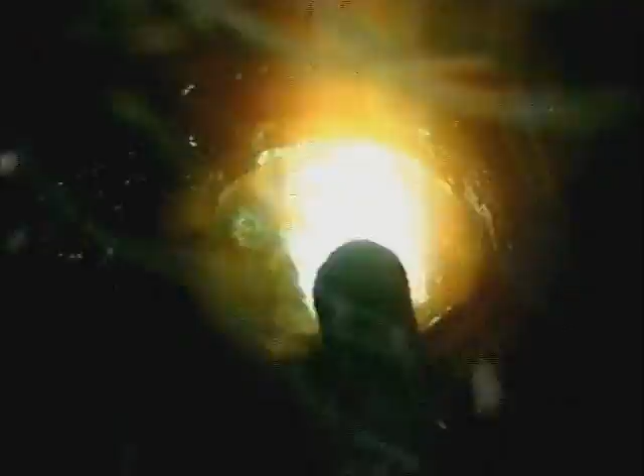From fabrication and repair shops to backyard garages, arc welding is one of the most common and versatile methods of joining metal. This is the SMAW, or shielded metal arc welding process. Electric current from a welding machine produces an arc between the base metal and a consumable electrode, which is the welding rod. That arc burns the flux coating on the rod, creating gases that shield the weld area from coming in contact with oxygen in the air.

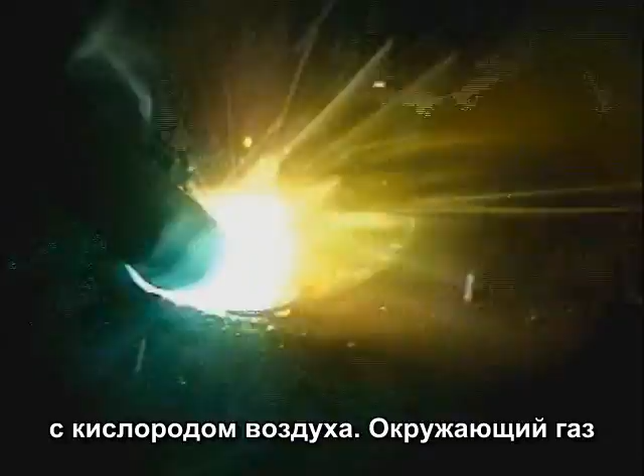The gases surrounding the arc are superheated, causing the base metal to melt, while the filler metal from the rod is being deposited into the molten puddle. Whether you're learning to weld to build something or make repairs, the first step is to learn how to consistently run a good weld bead.

Before we start burning rod, though, there are a few things you should know about the equipment we'll be using. So let's begin with the welding machines.

The job of a welding machine is fairly simple, and that is to provide a steady, controllable current to the electrode. Now, regardless of the size or shape, welding machines will provide either alternating current or direct current to the electrode. And this little machine gives you the choice of either AC or DC.

The main advantage of alternating current is that it's easier to produce. They use simple transformers, so you generally get more power for your money. This one will give you 225 amps on AC, but only 150 amps on DC.

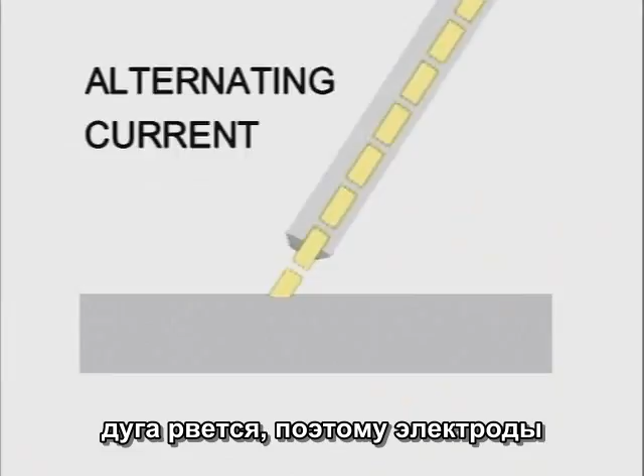If you think about alternating current, the electrons are moving back and forth, and at the point where the electrons change direction, the flow or current actually stops. Certain welding rods have been designed with stabilizers in the flux to help maintain and control the arc through these amperage lags. So if you're using a welding machine that provides alternating current to the electrode, you want to make sure to use a welding rod designed for alternating current.

Most welding shops and professional welders use machines that provide direct current to the electrode. And in my shop, I use a 250 amp DC machine. Direct current provides a steady flow of electrons in one direction. The polarity, or direction of flow, is determined by how the leads are connected to the positive and negative terminals on the welding machine. And many of the newer welding machines have a switch to choose the polarity.

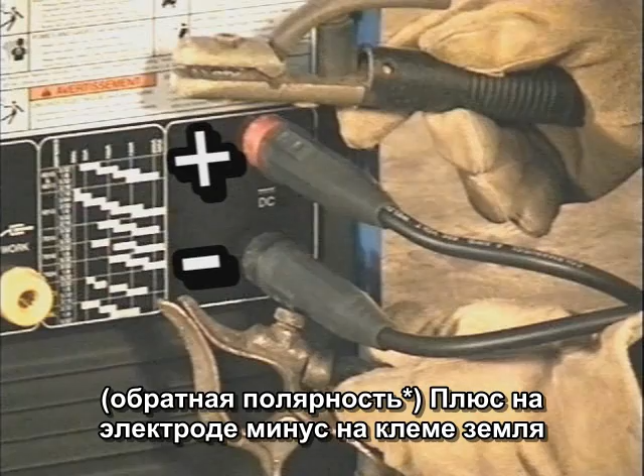DCEP, or DC plus, is direct current electrode positive. The electrode is connected to the positive and the ground is connected to the negative terminal. Current is generally considered to flow from negative to positive, so with the electrode positive, the arc actually travels from the metal up to the welding rod. This causes the tip of the rod to superheat. For general purpose welding, all the common welding rods use DC EP with the electrode positive.

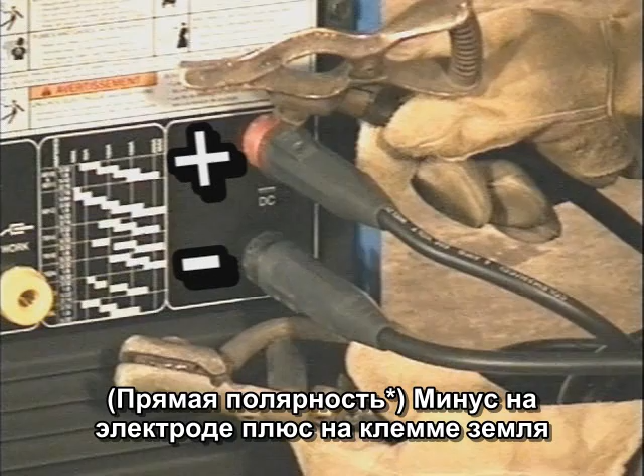DCEN, or DC minus, is direct current electrode negative. The electrode is connected to the negative terminal and the ground is connected to the positive. With DC EN, the flow is from the welding rod to the metal, so the rod stays cooler and the metal gets the heat. This is used with certain rods for high-speed sheet metal welding.

When you're starting out, you'll probably be welding with a machine that's put in front of you. And basically, if it's in proper working condition, you can weld with it. Keep in mind, though, that welding machines will weld differently. Even two identical machines may not operate quite the same. So while you're learning to weld, try to use the same machine as much as possible.

Welding leads are insulated copper wire and come in sizes like a number 4, 2, 1, and single aught. The larger the number, the smaller the diameter. The size welding lead you need to use depends on how many amps you'll be using and how long the lead is. And welding supply stores have charts to determine the size lead you need to use.

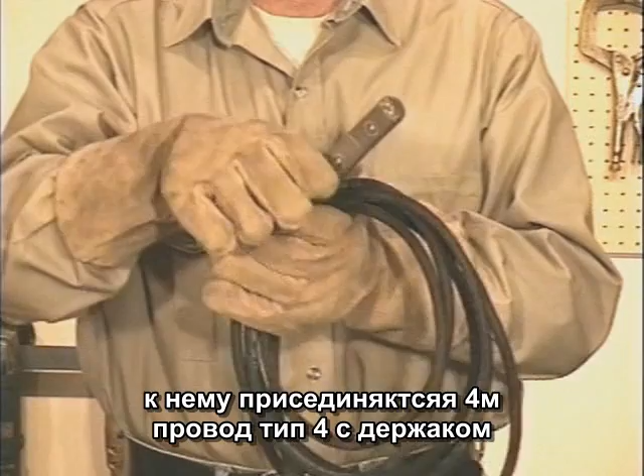On the end of the main lead, I use a quick connect with about 15 feet of number 4 lead and the electrode holder. This is called a whip. The smaller lead is a little more flexible and easier to deal with. This is a 200 amp electrode holder. Larger ones like 250 or 300 amp are available if you're mainly using big rods with high amperage settings. But for general use, the 200 amp is more comfortable. And I usually call this the stinger.

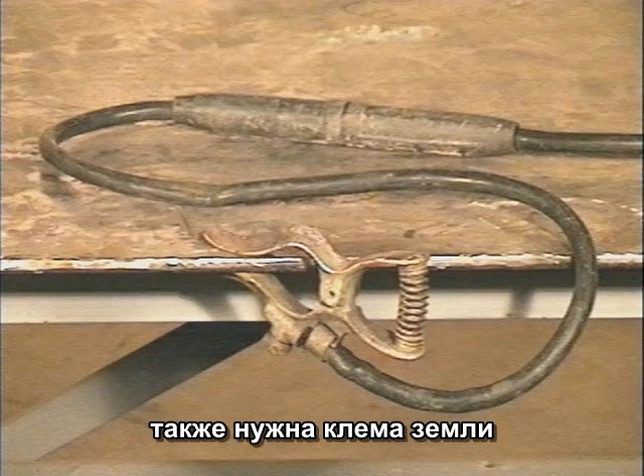Another type of electrode holder is available where you stick the rod in and twist the handle. If you need the rod at a different angle, you can just bend it. You also need a ground clamp, and I use a quick connect here too, in case I need to add more lead.

The light from arc welding is extremely bright. You need filter lenses both to see the molten weld puddle and to protect your eyes from getting burned. These are typically available from a number 8 to a number 14. The lower the number, the lighter the lens. From what I can tell, some people are more sensitive to this light than others.

A number 8 filter lens is way too light. Industry recommends a number 10, and I use a number 9. The lens has to be dark enough to protect your eyes, but light enough so you can clearly see the weld puddle. If you're welding with big rods using high amperage, you may want a shade darker lens than normal. And if this filter lens gets chipped or cracked, replace it.

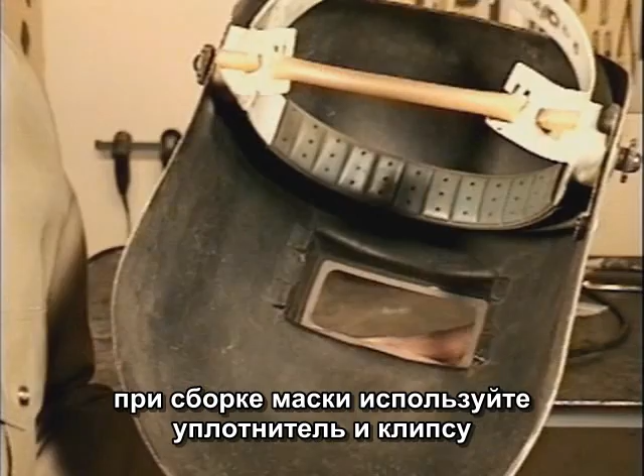To protect the filter lens from sparks or getting scratched, I use clear plastic lenses in front and in back. There's a gasket that goes in first to seal the lenses, and everything's held in place with a clip. After you install the lenses, hold the hood up to a light and check for leaks around the edges.

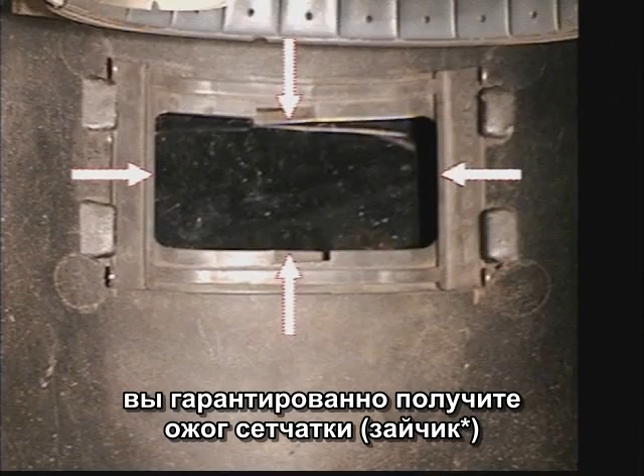When you start welding, check it again. If any light from the arc is leaking around the edges of the lenses, it'll burn your eyes for sure. Also, replace the clear lenses when they get dirty or scratched. Having a clean lens makes a big difference in allowing you to clearly see the weld puddle.

Okay, the last thing we need are welding rods. So let's take a look at some of the common ones. Some of the more common welding rods for carbon steel are E6010, 6011, 6013, and 7018. And the numbers are written right on the rods. These numbers actually mean something, so let's take a look at E6010.

The E designates an arc welding electrode. The first two numbers, in this case 60, indicate that the filler metal has a tensile strength of 60,000 pounds per square inch. Depending on certain conditions of the weld, you may get a little more or less, but it'll be close to that. The 70 in 7018 indicates 70,000 pounds per square inch. So the first two numbers indicate tensile strength, and tensile strength is the force it takes to pull it apart.

The third number indicates the position the rod can be used in. A number 1 shows that the weld puddle solidifies quick enough so this rod can be used in any position: flat, vertical, horizontal, or overhead. A number 2, like in 7024, indicates that the molten puddle remains so fluid this rod can only be used in the flat position or for a horizontal fillet, which is more or less flat.

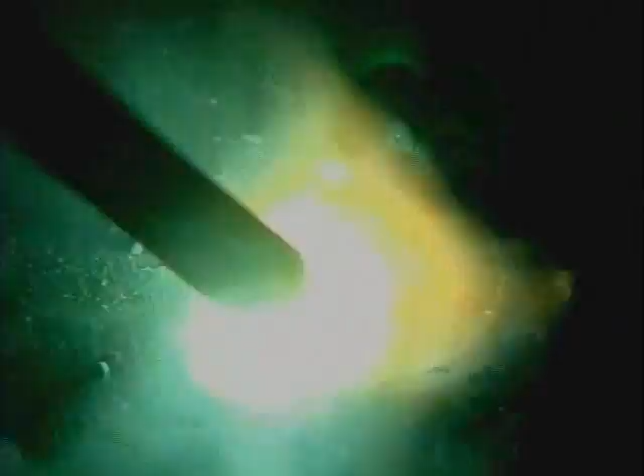The last two numbers together, here it's a 10, indicate the composition of the flux coating. And this flux is what makes the whole arc welding process possible. As it burns, a gas is created that purges the weld puddle, keeping the oxygen in the air from mixing with the molten metal, which could cause gas pockets in the weld bead called porosity.

The flux also helps stabilize the arc, and it lifts impurities from the molten metal. When the flux cools, it forms a slag coating over the hot weld bead, providing more protection from the air. There isn't a magic welding rod that just does everything. You may find one that you like to use, and that produces good results. But basically, welding rods can be put into one of two groups: fast freeze or filler.

The fast freeze rods, 6010 and 6011, have a strong arc force that provides deep penetration. A light flux coating makes the molten weld puddle clearly visible, and the weld puddle solidifies relatively quick, leaving distinct ripples in the finished weld bead.

Filler rods, 6013, 7018, and 7024, don't penetrate as deep. They build up weld bead. A heavier flux coating covers the weld puddle, keeping it more fluid, allowing for a smoother finished weld bead.

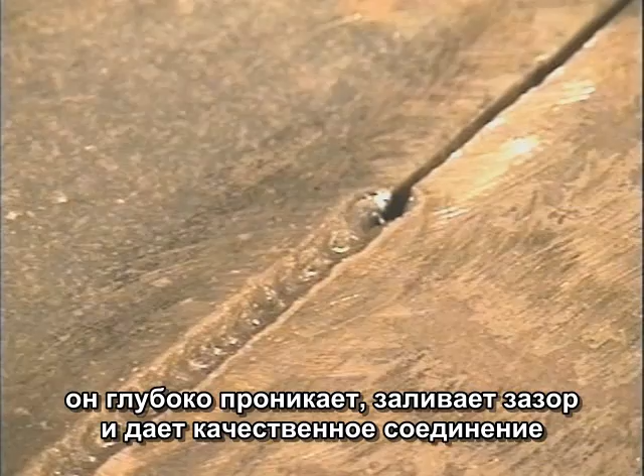So where exactly do you use these different welding rods? 6010 is used strictly on DC plus and 6011 on AC or DC plus. The strong arc force of these rods can blow off rust and paint, making these a good choice for repairs or modifications where the metal can't be completely cleaned. Also, these rods are often used as a first pass to provide deep penetration or to fill gaps and fit-ups that are less than perfect, then covered with a filler rod.

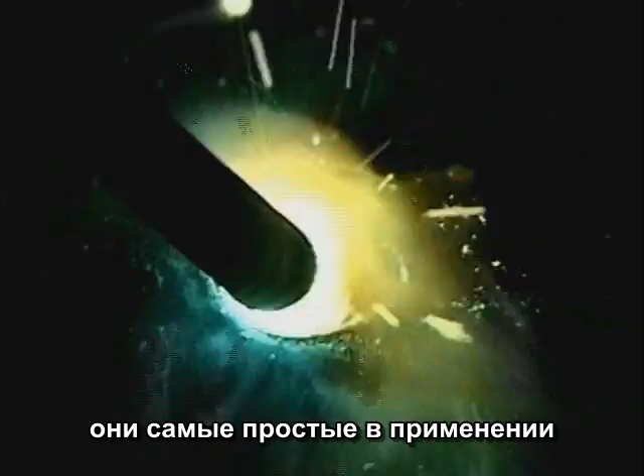6013 was actually designed for high-speed sheet metal welding on DC-, but these rods can also be used on AC or DC+ for general purpose welding and light fabrication. With stabilizers in the flux, 6013 is probably the easiest of all the rods to use, and it produces a smooth finished weld bead.

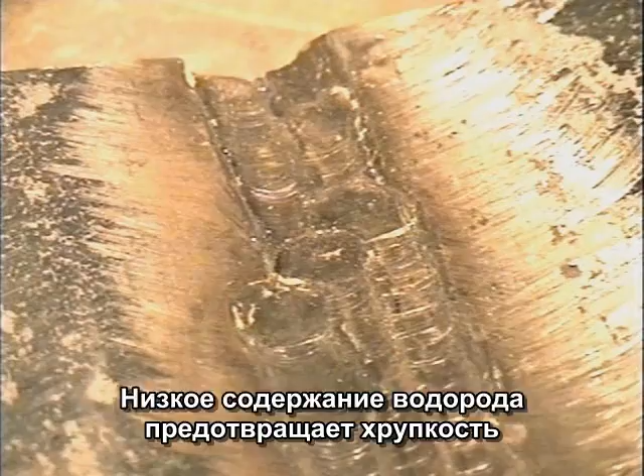7018 is a low hydrogen rod with iron powder in the flux. It's generally used on DC+, and an AC 7018 is also available. These produce the highest quality welds and were developed for situations where there's extreme stress on the weld joint. It can be used to weld some of the harder low alloy steels and cast steels, and when making heavier welds, the low hydrogen characteristics prevent the weld from cracking because of the expansion and contraction of the metal. Iron powder in the flux provides a high filler metal deposit rate, which means you can put more metal down faster. 7018 produces a smooth finished weld bead, but does require clean metal and a well-prepared joint.

7024 was used extensively in fabrication before wire feed. A heavy flux coating produces an extremely smooth weld bead, but these rods do require clean metal and a slightly higher amperage setting. 7024 can be used on DC+ or AC, and the 2 does indicate that this rod can only be used in the flat position.

6010, 6011, 6013, and 7018 are common rods and should be available everywhere. There are other welding rods, and they'll either be a fast freeze or a filler, with a different tensile strength, a slightly different flux covering, and usually designed for a specific purpose. Now, each of these rods has distinct characteristics, but there are some basic fundamentals that are common to all of arc welding. We'll start with the fast freeze type rods, because the light flux allows you to see the molten weld puddle clearly.

The fast freeze rods 6010 and 6011 are similar, and the same techniques can be used with either one. 6010 on DC+ might freeze or solidify a little quicker. 6011 with either AC or DC+ may be a little easier to use because of the stabilizers in the flux that help maintain the arc.

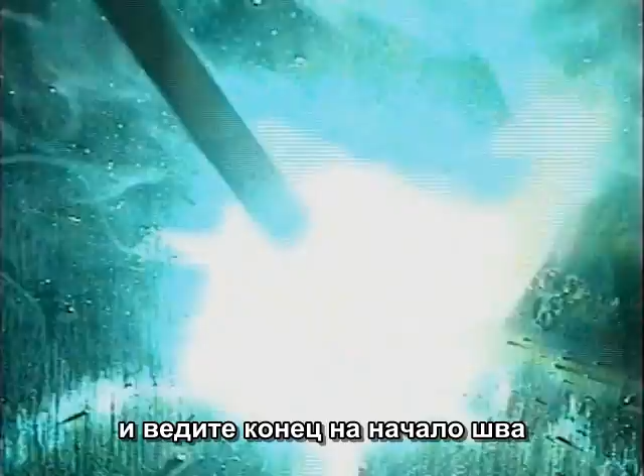Starting the arc is like lighting a match. Drag the rod right against the metal. When it lights, bring the tip up and move back to the start. A scratch start gets the flux burning, forming the gases that purge air away from the molten puddle. To avoid leaving arc burns all over the metal, try to scratch right where you intend to weld. I usually hold the stinger with my thumb on the release lever. If the rod ever sticks, just open the stinger, then go back and break the rod off. If you're relighting a rod, the flux may be broken off a little at the tip. A scratch start will burn off that tip before you start depositing metal.

Once the rod is burning, you need to start the puddle, giving the molten filler metal a little extra time to fuse to the base metal. This doesn't take long, only 2 or 3 little circles. Also, as the weld progresses, the base metal will heat up, causing the molten puddle to spread out. Start the puddle wide enough to keep the weld bead a uniform width.

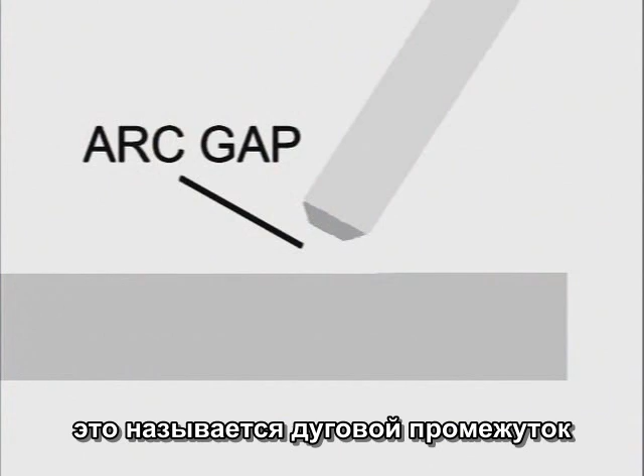During the weld, the tip of the rod is held up off the metal. This is called the arc gap. Having control of this arc gap is one of the first and may be the most important thing you need to learn. As you're moving along to build weld bead, the rod is being consumed, so you also have to be moving in. And the whole time you need to maintain a constant, uniform gap between the tip of the rod and the base metal. If the tip of the rod is jammed right down on the metal, the arc doesn't have time to heat up the base metal.

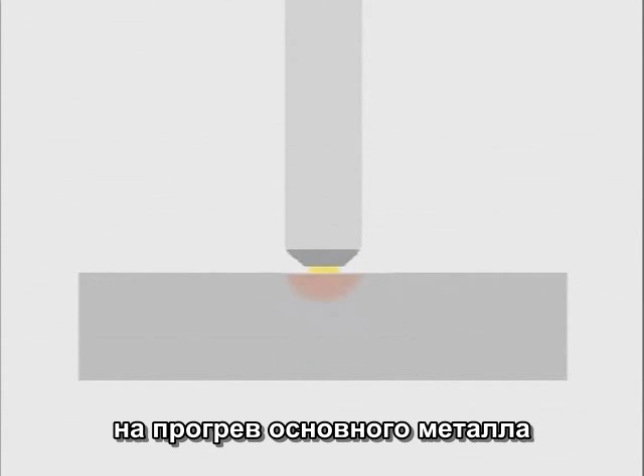The weld bead kind of squirts out the back, not tying in well on the sides. If the arc gap is too long, the arc itself can jump around. Penetration will vary and you lose control of how the filler metal is deposited.

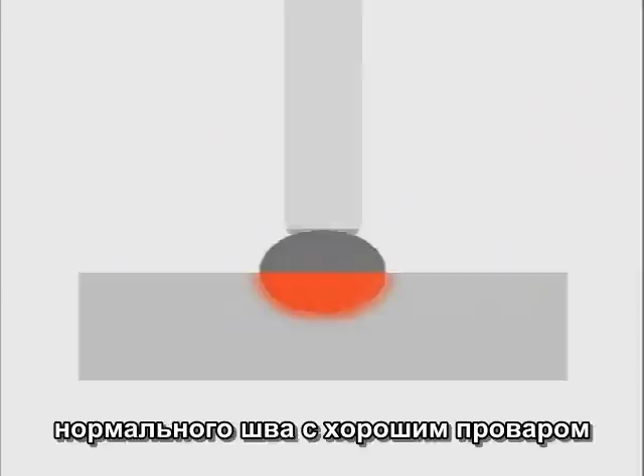Maintaining a constant arc gap is the first step to controlling the molten puddle and producing a uniform weld bead with consistent penetration. The better you learn to control that arc gap, the better you'll be able to weld.

When the arc crosses the gap, it melts the base metal, forming a molten puddle. That arc stream also carries the filler metal from the rod into the puddle.

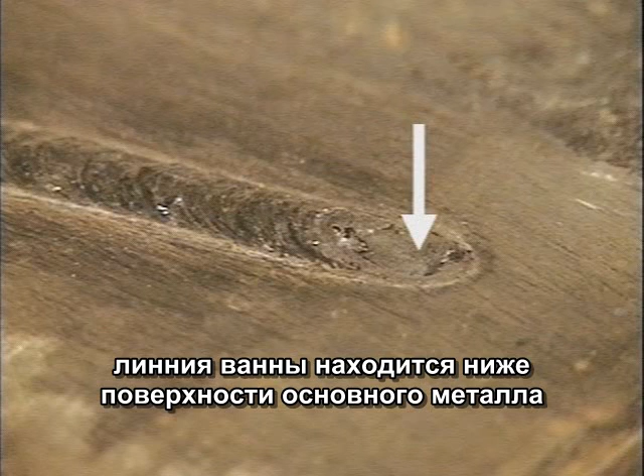This is a 6010 weld bead that I pulled out of quickly. The leading edge of the puddle was actually below the surface of the metal. The strong arc force of 6010 and 6011 penetrates deep into the base metal and pushes the molten puddle back, building up weld bead. While you're welding, watch the sides, right where the weld buildup meets the surface of the base metal.

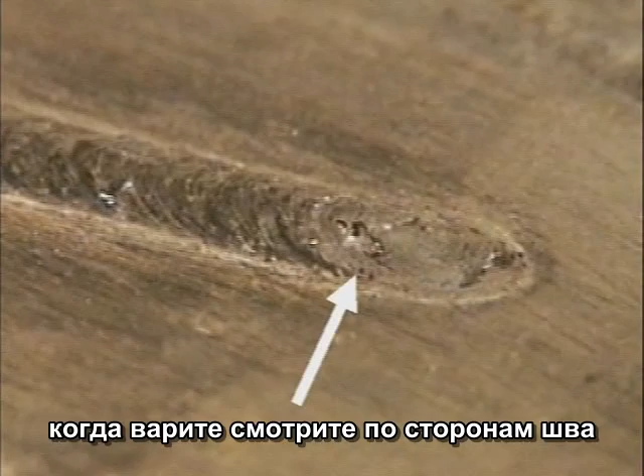For building up weld bead, either a circular or zigzag motion is commonly used. With a circular motion, as you ease the puddle over, watch the edge. When you bring it across, watch the weld build up, then the other side, and just ease the puddle around and around.

A side-to-side or zigzag motion will produce nearly the same weld bead. Watch the outside edge, the weld build up, and the outside edge every time you cross.

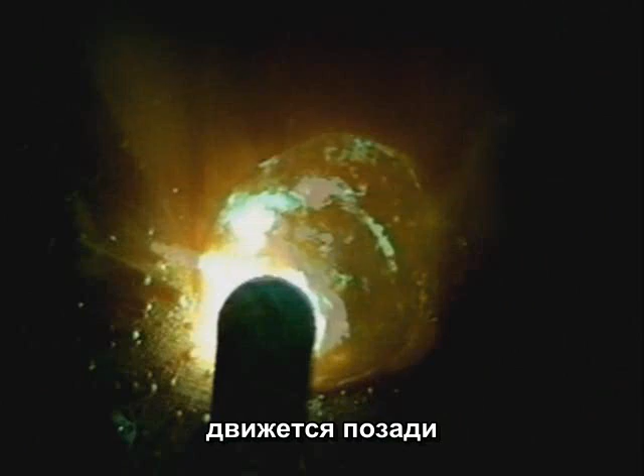Something you want to keep in mind is that molten metal will follow the heat. Whenever you move the puddle across, while you are adding filler metal from the rod, molten metal is also following from the side. If enough metal isn't put back there when you come around again, you'll leave undercut.

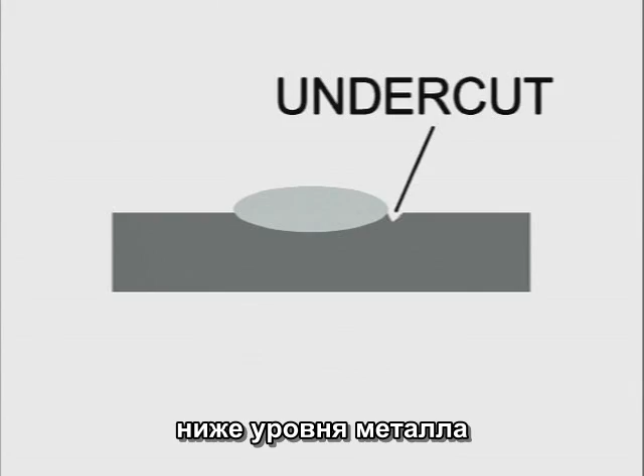Undercut is a void or groove along the edge of the weld bead that's below the surface of the base metal. You can avoid this by always watching the outside edges to make sure the puddle is filling in and tying in at the surface.

There's an arc force at the end of this rod that we can use to help manipulate the weld puddle by angling the rod. Think of it more like pushing the puddle instead of dragging it.

Generally speaking, the straighter up and down you hold the rod, the less weld buildup. As you angle the rod, the more the weld bead will stack up. When the rod is held straight up and down, all the heat is concentrated right under the rod, and the arc force drives the puddle down.

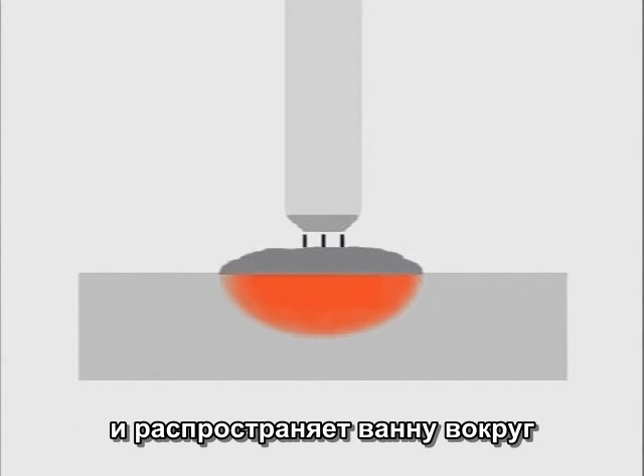This results in deep penetration and spreads the puddle out for a flatter weld bead. As the rod is angled, the arc force is directed more to the back of the puddle, allowing the weld to build up. If the rod is angled too low, the arc is directed right where you're trying to build weld, making the puddle hard to control.

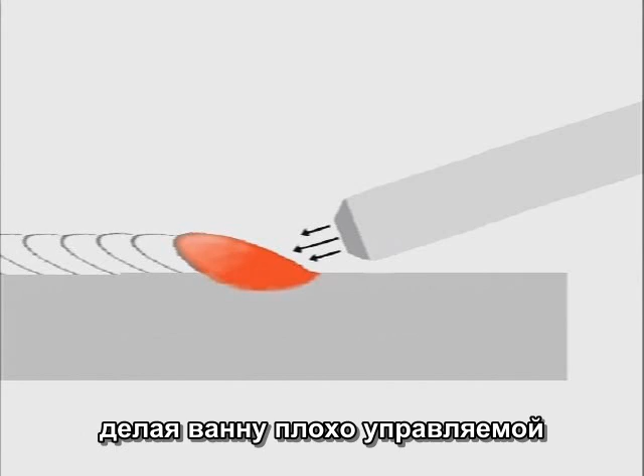You will run into situations where you may want to flatten out the weld, or you'll need to push the puddle back more, so you'll use different rod angles. When you're starting out, an angle somewhere between 45 degrees and straight up and down is comfortable, allows a good view of the puddle, and works well for building weld bead.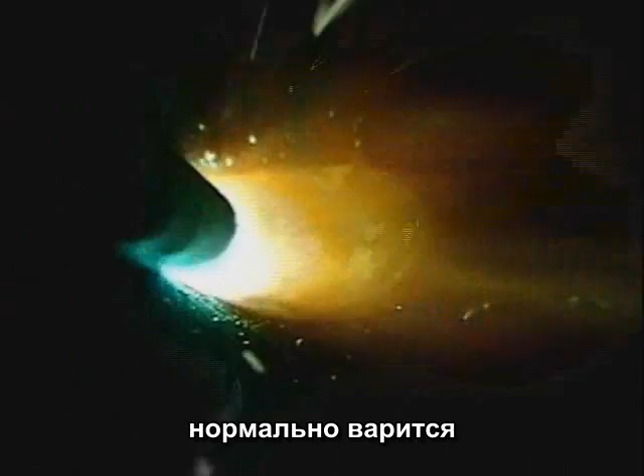The rod size is the diameter measurement of the metal in the electrode. Common sizes are 3/32, 1/8, and 5/32.

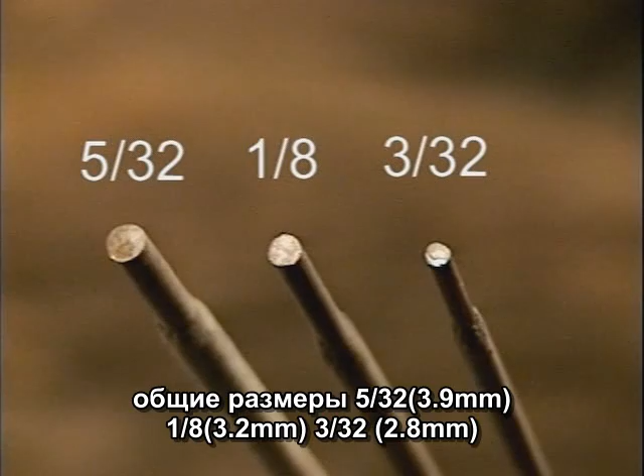Most welding rod size charts, where they give the metal thickness to the rod size and amperage setting, are generally from the point of view of maximum weld in minimum amount of time, often not taking into account the welder's ability or different welding situations.

You can always use a smaller diameter rod for better control. It just takes a little longer to build up weld bead.

This is a 1/8 E6010 electrode, and this is the most common size used. The manufacturer's recommended amperage setting is from 75 to 130 amps. They're saying this rod will work over a 55 amp range. The specific amperage setting is considered a variable and depends on metal thickness, position of the weld, and the welder's ability.

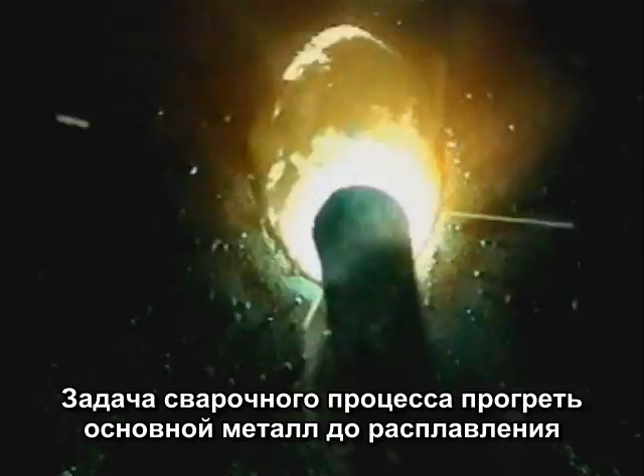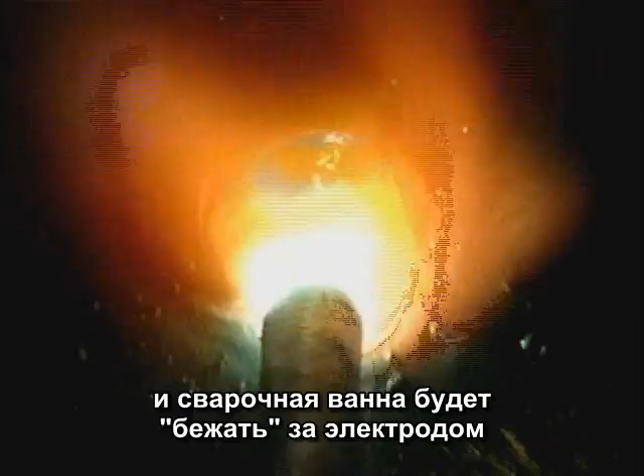The whole purpose in arc welding is to get the base metals hot enough to melt, forming a molten puddle. If the amperage is set too low, the base metal doesn't get hot enough, and the puddle looks like it's following the rod around.

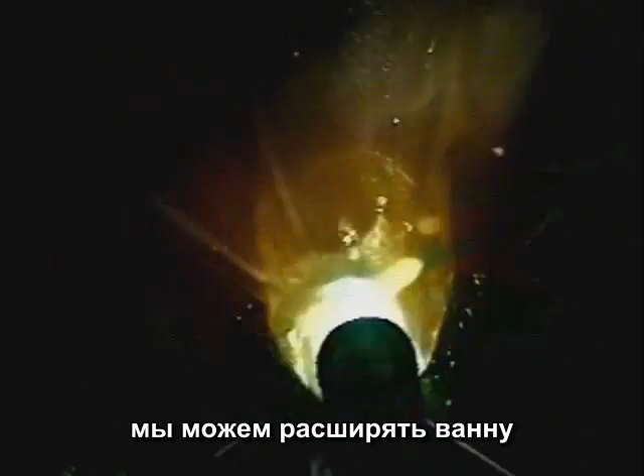If the amperage is set too high, the base metal gets too hot. The stronger arc force gouges deep into the base metal and pushes the puddle back. When the amperage is set about right, the puddle will spread out and the outside edges tie in immediately. You can ease the puddle around, kind of pushing it with the movement of the rod.

Depending on each welding situation, the amperage setting can change. Thicker metal dissipates the heat, so you need a little more amperage. Thinner metal will get hot fast, so you can use a little lower amperage. The final amperage setting is determined by what the molten puddle is doing. You do need a place to start, so try about the middle of the manufacturer's recommended range, and don't be afraid to go up or down a little bit.

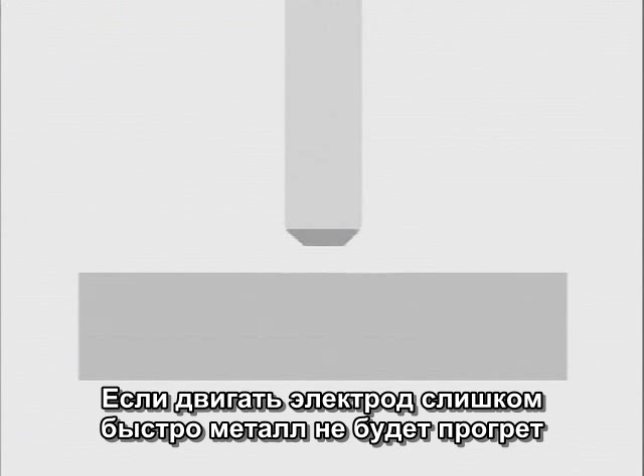Welding really is about the temperature of the base metal, so we can't talk about the amperage setting without looking at the speed of progression, or travel speed. The faster you move, the less time heat is put to the base metal, so it stays cooler. When you move slower, you're putting the heat to it for a longer amount of time, so the base metal gets hotter. When you move too fast, the metal doesn't have time to heat up, so the weld bead just skates across, not getting any penetration.

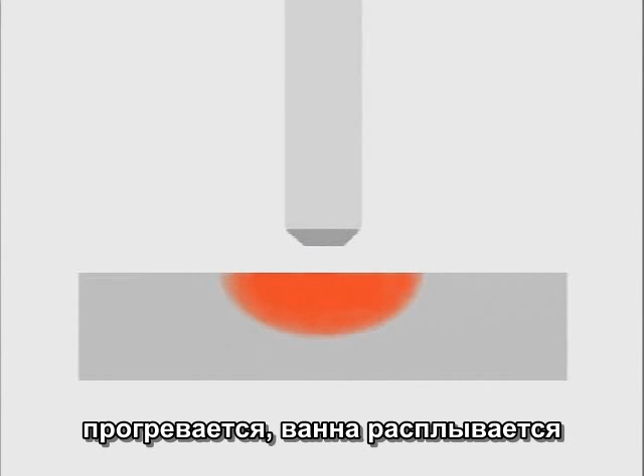If you move too slow, the metal gets extremely hot, causing the puddle to spread out, making it hard to control. When the travel speed and amperage setting match, the puddle spreads out, but it's still controllable. The sides tie in and the weld builds uniformly.

As you gain more control of the rod, try using a slightly higher amperage setting and increasing the speed of travel. The higher amperage setting provides better penetration and a smoother finished weld bead. Try to weld as hot as you can control the molten puddle.

To finish a weld bead, add a little extra metal before you pull out, to avoid leaving a crater that's below flush with the surface of the base metal. Circle the rod once or twice, then bring the rod up and back over the weld.

While different rods may not look quite the same, these are the basic steps for all the welding rods. Scratch to get the arc going. Start the puddle wide enough to keep the weld a uniform width. Maintain a uniform arc gap with an amperage setting high enough to let the puddle spread out. Ease the puddle around using the force of the arc and watch the sides and the weld build up. Add some filler metal before pulling out over the weld bead. That's about all there is to it.

For 6010 in the flat position, try a circular motion and angle the rod to build up weld. Watch the molten puddle, not the light. Keep the circles tight for a smoother weld bead. A zigzag motion will produce about the same weld. Watch the edges to make sure they're filling in and ease the puddle back and forth.

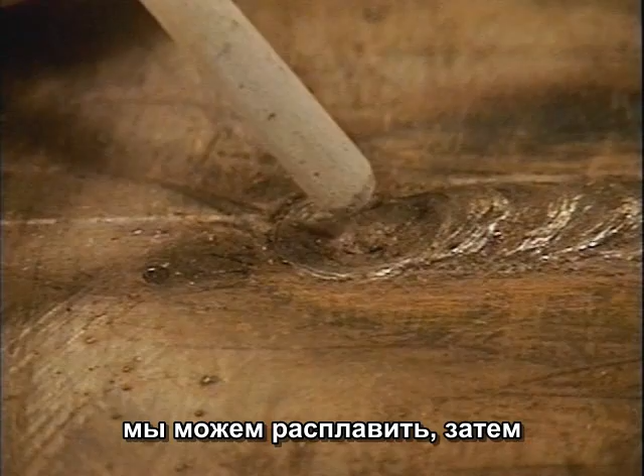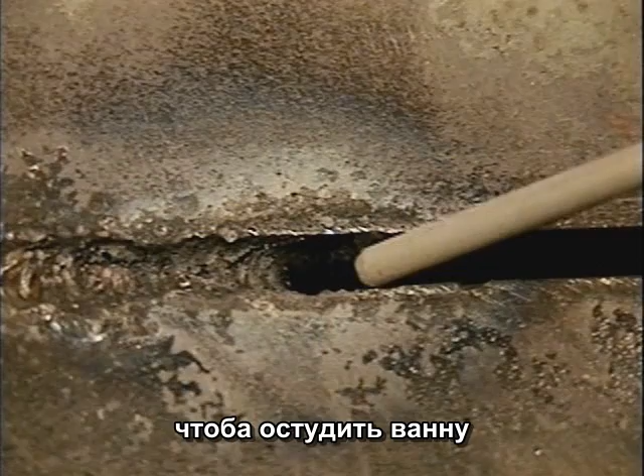On thinner metals, where you don't need a lot of penetration, you can puddle, then long arc to let the weld bead cool, and puddle again. The thinner the metal, the faster this goes. The step motion can also be used to fill gaps in poorly fit joints. Keep the rod deep in the gap and bring it back, allowing the metal to cool. Then push a little more metal in to fill the gap and let it cool again. The step motion may not always look real slick, but it's usually covered with another pass.

So far, we've been welding in the flat position. For a vertical with 6010, you can run either uphill or downhill. Downhill is easier, but there's less penetration and weld buildup. Because heat rises, you're welding away from the heated metal, so you can use a slightly higher amperage setting. Watch the sides and the weld buildup.

Try a circular, zigzag, or step motion and angle the rod up a little so the force of the arc helps hold the puddle up. With a circular motion, keep a steady arc gap and ease the puddle around. Move fast enough to stay ahead of the molten puddle. If the puddle wants to drip down, try moving faster, or maybe even a slightly higher amperage setting.

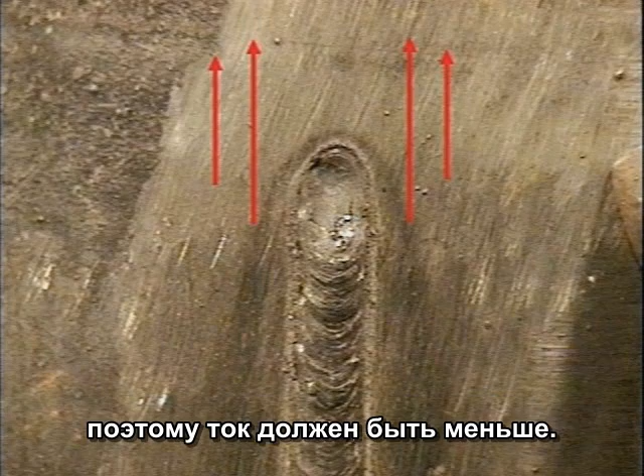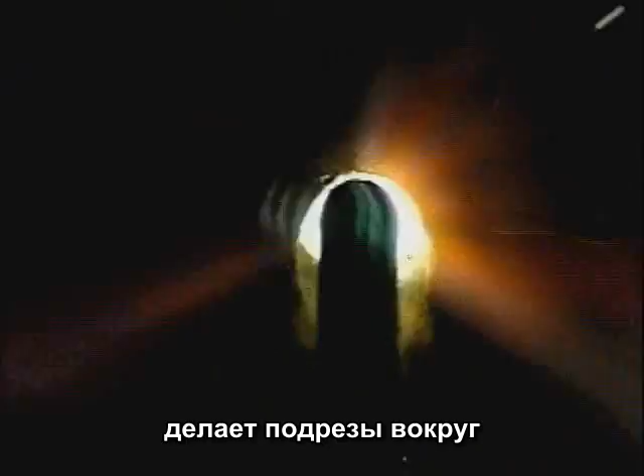When you weld uphill, you'll be welding into the heated metal, so turn the amperage down a little. Angle the rod up so the force of the arc doesn't blow the puddle out. An uphill weld really gouges into the base metal, making undercutting a potential problem. So pay particular attention to the sides of the puddle and watch the weld buildup underneath the rod.

If the base metal gets too hot, the puddle may fall out, or you might burn a hole right through the metal. Mess with the amperage setting and your travel speed until you can carry that puddle right uphill.

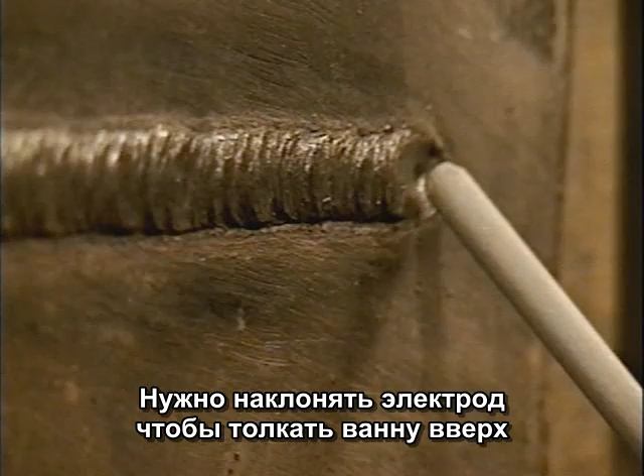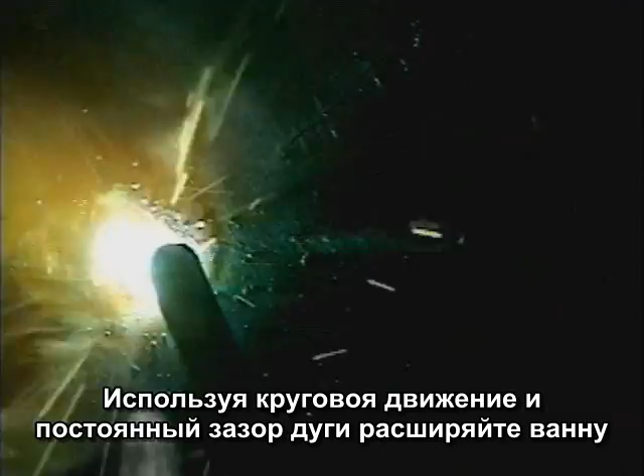A horizontal weld is across, and you want to angle the rod to push the puddle up. Keep the rod nearly perpendicular to the metal or angle into the weld a little bit. If you angle the rod too far, the arc force can blow the puddle out. Using a circular motion, keep a steady arc gap and just ease the puddle around.

Every time you bring the rod down, the molten metal will follow the heat. Make sure you push the puddle up and watch the top side. If the bead is wanting to sag down, try a faster travel speed to keep the base metal cooler.

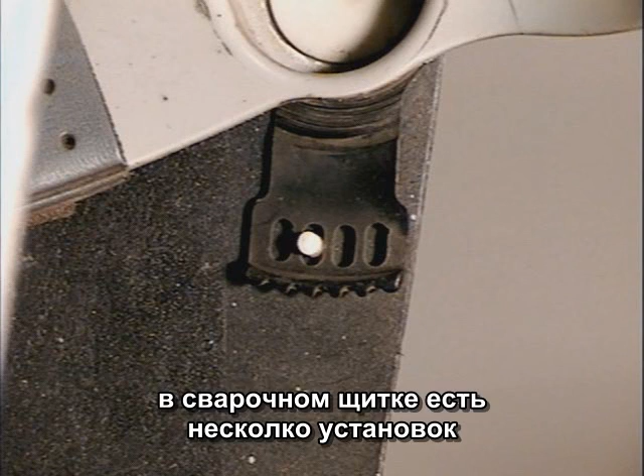That leaves us with overhead, straight up and down. Overhead is about the same as welding flat, just a little more awkward. The real challenge is to find a comfortable position so you can keep the rod steady. Your welding hood should have an adjuster to help hold it up, so you don't have to bend your neck back so far.

Now, believe it or not, the molten puddle doesn't want to fall out. Unless you blow it out with the arc force, the molten metal wants to stay with the heat. It likes the heat. Hold the rod nearly straight up and down or angled slightly in the direction of travel, away from the weld. Try a circular motion and just make the puddle look the same as when you're welding flat. All the sparks will be coming your way, so wear protective clothing like a leather coat, some good gloves, and I like to cover my ear with a hat. Getting burned is a little distracting when you're trying to run a good weld bead.

6010 and 6011 won't give you a smooth finished weld bead, but they do provide deep penetration in weld joints and when making repairs.

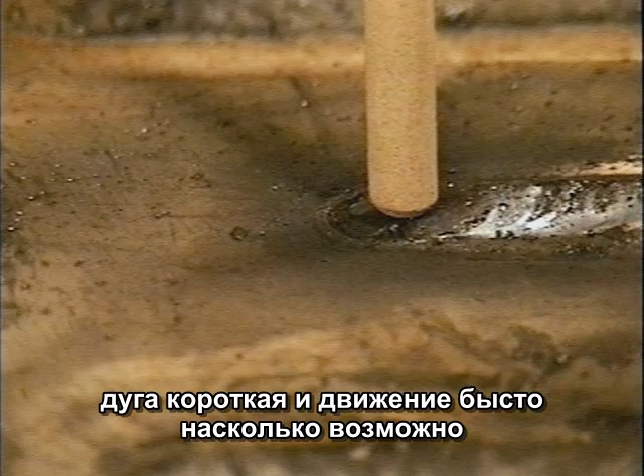6013 welding rods were developed for welding sheet metal on DC-. The rod is held perpendicular to the metal with a tight arc, and the travel speed is as fast as you can go without having the weld bead skip.

Today, 6013 is more often used for general purpose welding with AC or DC+, and it is a good rod for the small, low amperage welding machines.

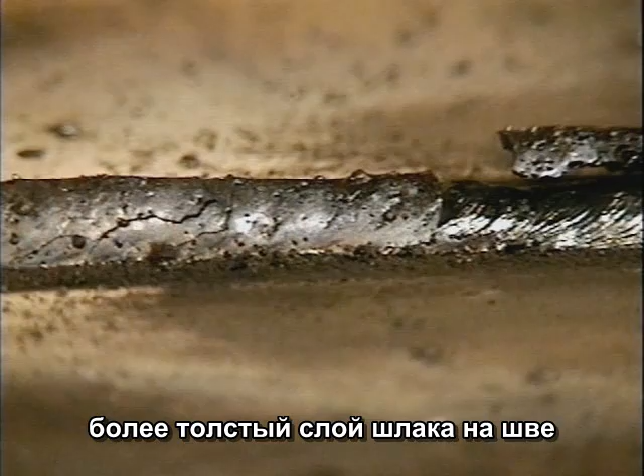One of the first things you'll notice about 6013 is that there's a heavier slag coating on the weld bead. The slag even covers the top edge of the weld puddle. This keeps the puddle more fluid, helping to produce a smoother, finished weld bead.

Typically, 6013 is available in 3/32, 1/8, and 5/32. 1/8 is the most common size used, and try starting with an amperage setting around 130 amps on AC or 115 amps on DC.

Because of the slag covering, the differences in the appearance of the weld are a little more subtle, but when the amperage is set too low for the situation, the puddle will follow the rod around, taking longer to tie in on the sides. The heavier slag may even interfere with the arc.

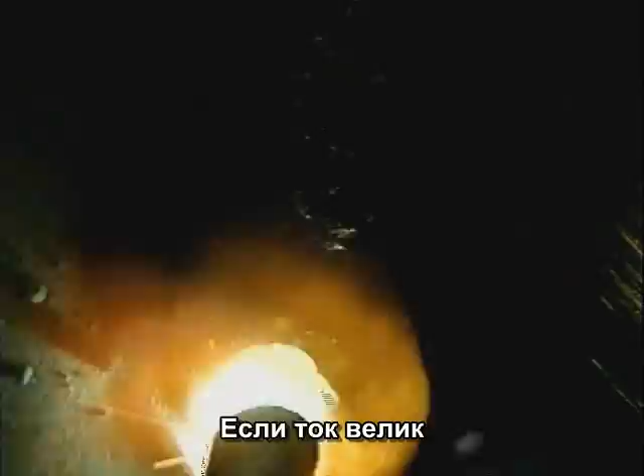If the amperage is set too high, the molten puddle and slag are extremely agitated and remain molten longer. When the amperage is about right, the weld puddle spreads out, tying in and moving easily with the motion of the rod. In the flat position, you can run straight or try a little side-to-side motion.

Angle the rod somewhere between 45 and 90 degrees to build up weld bead. Scratch start the puddle, and maintain a short arc gap, even to the point of lightly resting the tip of the rod on the metal.

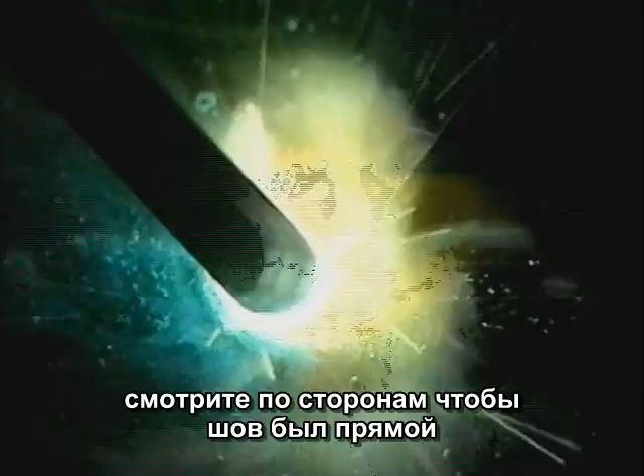Watch the puddle. The slag covers the top edge, but you can still get an idea of the weld buildup. Watch the sides to keep the weld bead straight, and just ease the puddle side to side.

On vertical welds, 6013 was designed for a downhill application. You'll be welding away from the heat, so try turning the amperage up 5 to 10 amps. Angle the rod up so the force of the arc helps hold the puddle up.

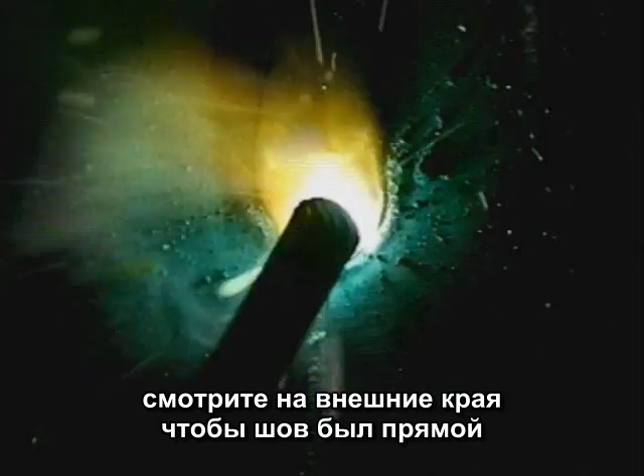Maintain a short arc gap and try a slight side-to-side movement. Watch the outside edges to keep the weld bead straight and travel fast enough to stay ahead of the molten puddle. If you can't stay ahead of the molten puddle coming down, try moving a little faster or raising the amperage setting.

For more weld buildup on heavier metal, 6013 can be run uphill. Start by turning the amperage down 5 to 10 amps.

Try using a side-to-side motion, moving up fast enough to keep the puddle from dripping down. Make sure the sides are filling in to avoid leaving undercut. To make a horizontal weld, angle the rod up to help push the puddle up.

Keep the rod nearly perpendicular to the metal or angled back into the weld just a little. Maintain a short arc gap and constant travel speed to produce a smooth weld bead. The molten slag will run down, covering the bottom, but watch the top side of the puddle. Move fast enough to avoid excessive weld buildup.

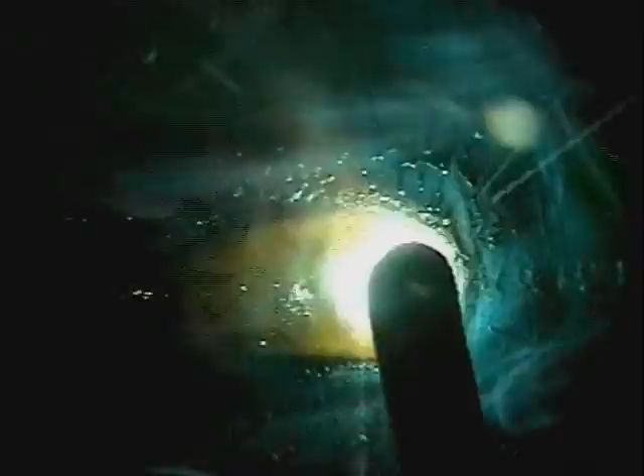While you're learning to weld horizontally, don't try to carry too much metal. Keep the weld bead small. If you need more weld, you can always run a second pass above the first one.

Overhead with 6013, like every other type of welding rod, is awkward. Hold the rod straight up, or, because of the mild arc force, you can angle it back into the weld a little bit, and try a slight circular motion. The heat of the weld is going straight up, right where you want it.

So if you can get in position to maintain a short arc gap and uniform travel speed, overhead will produce a good weld. 6013 is the favorite rod in many home shops. They're easy to light, they maintain the arc, and produce a good-looking finished weld bead.

7018 produces an extremely high-quality, good-looking weld bead. This is the rod to use for heavier fabrication and repair, or any situation where there's stress on the weld joint. These rods rely on a heavy slag coating to protect the molten weld puddle from coming in contact with oxygen in the air. This heavy slag makes 7018 run a little different than the other rods we've looked at.

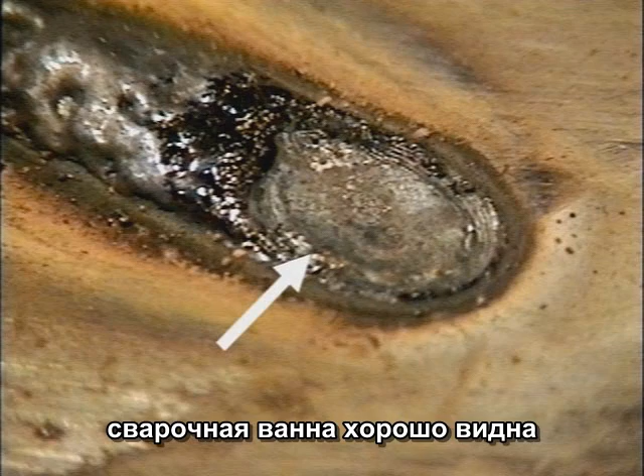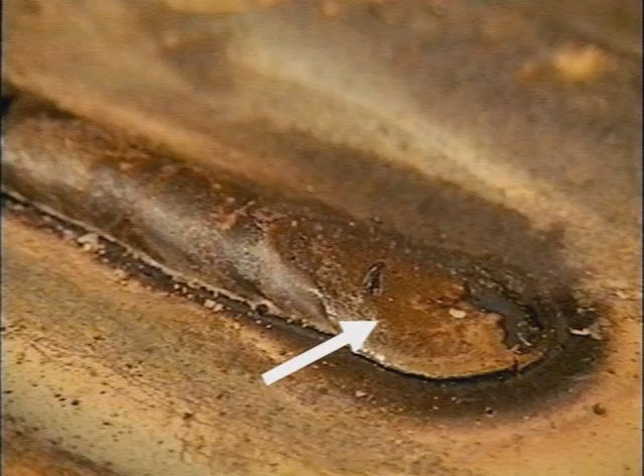With the fast freeze rods, 6010 and 6011, the molten metal in the weld puddle is completely visible. Slag covers the top edge of the molten puddle with 6013, but the filler metal and slag solidify pretty much at the same time. With 7018, the entire weld puddle is covered by molten slag. The filler metal actually solidifies underneath, while the slag stays molten on top.

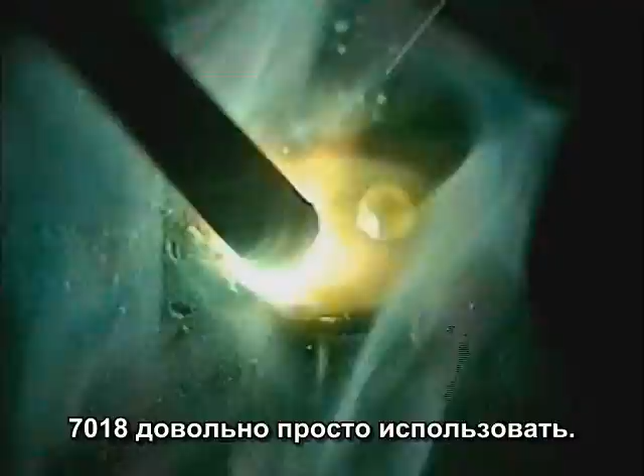If you keep in mind that what you see is molten slag and understand what the metal is doing underneath, 7018 is fairly simple to use. And even though the metal is solidifying underneath, watching the molten slag behind the rod will give you an idea of the weld buildup.

7018 is a little more sensitive to arc gap and rod movement. Make sure you're comfortable so you can be as steady as possible. A scratch start will get the flux burning before you deposit any metal. If you're relighting a rod, there's usually slag covering the tip. You may have to bump the rod to break that slag, then scratch to get going.

Once the rod is lit, start the puddle. Besides tying in and getting started wide enough, this gives a little extra time for the gases to cook out of the molten puddle. If you move too quick, gas pockets may cause voids in the weld bead called porosity.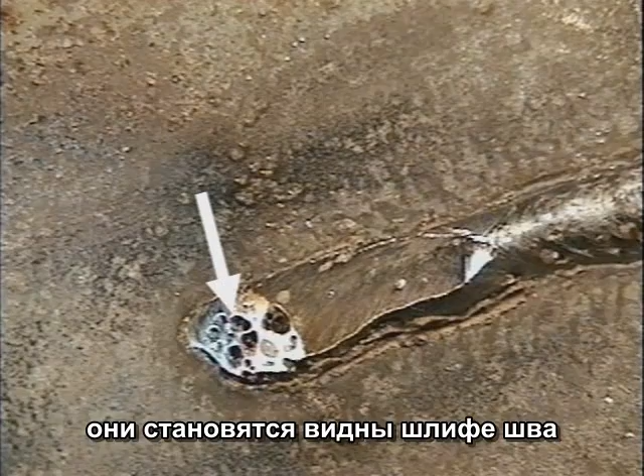Most times they're not even visible until you grind into the weld bead. Porosity can also be caused by welding on metal that's rusted, painted, or has any contaminants on it like oil or grease. 7018 does require clean metal.

After the puddle is started, try a little side-to-side motion, maintaining a constant short arc gap. In some situations, you can even lightly rest the rod on the metal. With a mild arc force and slag covering the puddle, you do want to avoid letting the rod burn up or pulling the rod away from the metal. You don't want to let that slag cool, so keep the arc in the puddle.

The typical rod sizes are 3/32, 1/8, and 5/32. Because the flux contains iron powder, which deposits more metal in the weld puddle, 7018 requires a little higher amperage, and these settings may vary up or down depending on metal thickness, weld position, and your ability to control the movement of the rod.

With molten slag covering the entire puddle, you depend more on how the puddle acts than how the puddle looks. If the amperage is set too low for the conditions, the puddle won't spread out, taking longer to tie in on the sides.

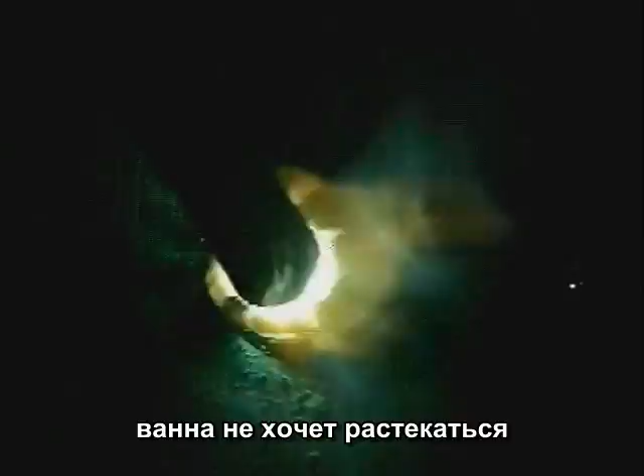The rod might stick or go out. If the amperage is set too high, the puddle is agitated and extremely fluid. Little balls of metal might dance off to the sides, causing excessive weld spatter.

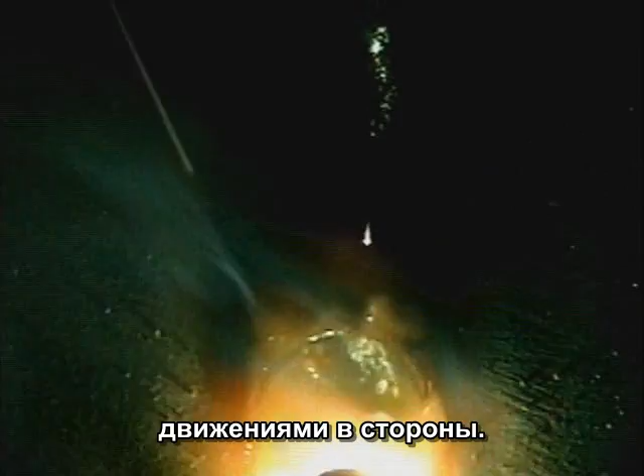When the amperage is about right, the slag solidifies back from the rod. The sides tie in and you can ease the puddle side to side. Here again, as you gain control of the arc gap, rod movement, and travel speed, you'll find that 7018 runs easier and cleaner with the amperage set a little to the hot side.

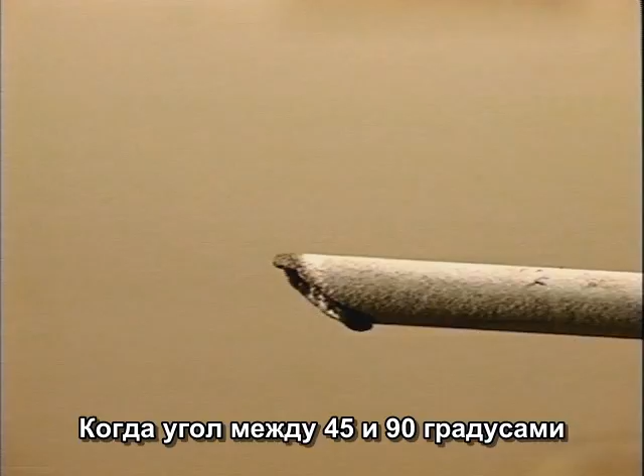The angle of the rod not only affects how the filler metal is deposited, but how the molten slag will behave. If the rod is held straight up and down, the slag can get in front of the weld puddle. If the rod is laid too far down, the flux coating won't burn evenly and the rod may stick. When the rod is angled between 45 and 90 degrees, the slag is forced back where it belongs, over the molten filler metal.

Welding in the flat position is fairly simple. Remember to relax, get comfortable, and use two hands on the stinger. Try to maintain a short arc gap and constant travel speed. Watch the outside edges of the puddle to make sure they're fusing and staying even. Look behind the rod for an idea of the weld buildup.

In the flat position, even 5/32 rods are fairly easy to control if your welding machine can produce enough amperage and there's plenty of metal to carry the heat.

For a horizontal weld, we'll be welding across. If you're just starting out, try using a 3/32 rod. The smaller puddle is a little easier to control. Normally, I weld from left to right because I can see the puddle better. For 7018 in a horizontal position, I move from right to left. You can weld in either direction, whichever is more comfortable.

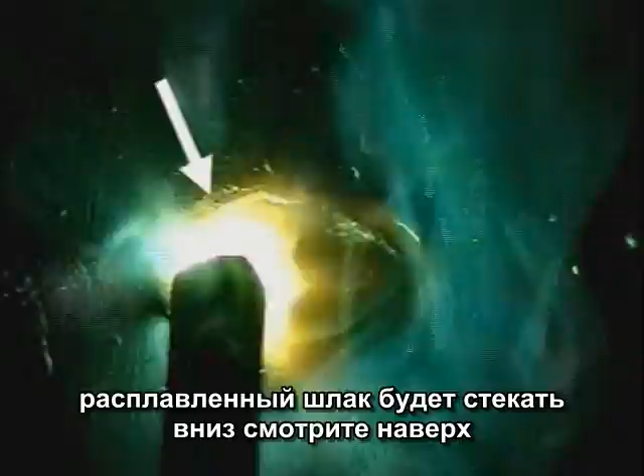Angle the rod up and back into the weld a little. The puddle is fluid, so keep moving to avoid excessive weld buildup. Molten slag will cover the bottom, but watch the top side to keep the bead straight and avoid undercut.

If the weld bead wants to sag, try increasing the travel speed. You want to go slow enough to let the molten metal fuse, but fast enough to keep the base metal from overheating, which causes the puddle to get more fluid and sag.

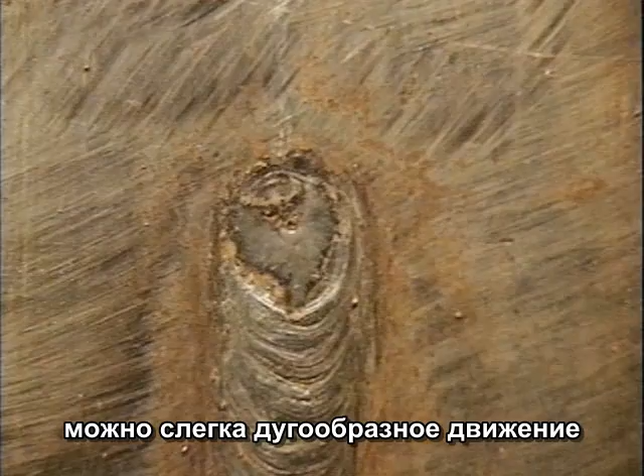Vertical welds with 7018 are made uphill. Start at the top and scratch down to where you want to start the puddle. You can run straight up or use a side-to-side movement. When I do this, it feels like there's a slight arc in the motion. Move across the center relatively quick. As soon as the puddle ties in on the side, cross back and keep on going.

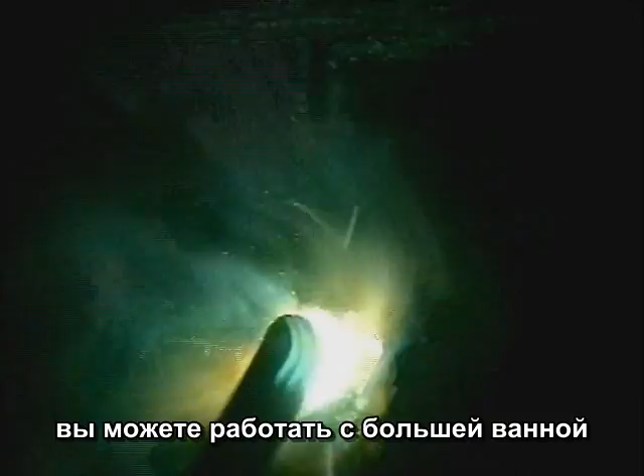The amperage setting and travel speed go hand in hand, especially when you're going uphill. Maintain a constant short arc gap. Don't let the rod burn away, and don't jam the rod into the puddle. As you gain experience, you can carry more metal, but try starting out with a 3/32 rod and keep moving. You don't want the base metal overheating, which is the main reason the puddle falls out.

Overhead with 7018 produces an excellent weld. The heat is going right where you want it. Try about the same amperage you'd use for welding flat and hold the rod nearly straight up and down or angled slightly into the weld.

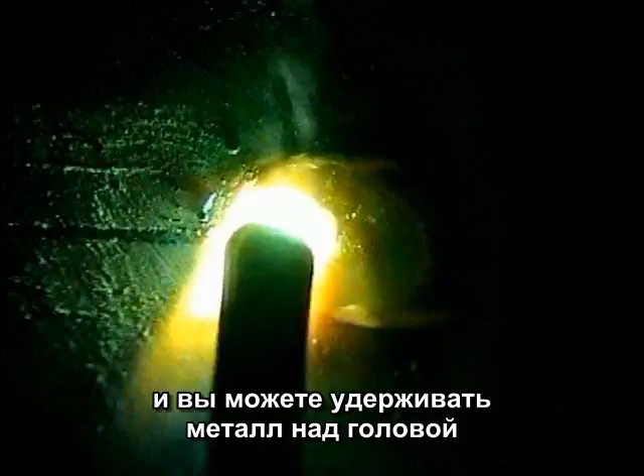You can run straight or try a little side-to-side motion to carry more metal, and you can carry quite a bit of metal overhead. Get comfortable and be creative if you have to. When you can control the rod movement, that metal will stay up there.

However, because the slag remains molten longer, it can drip. I usually wear a leather welding jacket for overheads since you'll be right underneath the weld. 7018 takes a little more practice, but it's well worth the time to learn how to use this rod.

Well, that's about it. I hope I've given you an idea of what to do and what to look for to run good weld beads. As you're welding, concentrate the whole time you're burning that rod and focus on the molten puddle. Do whatever it takes to make that puddle do what you want it to do. There isn't anything automatic about arc welding. You need to put that metal where it belongs and learn to see the weld as it's going in.

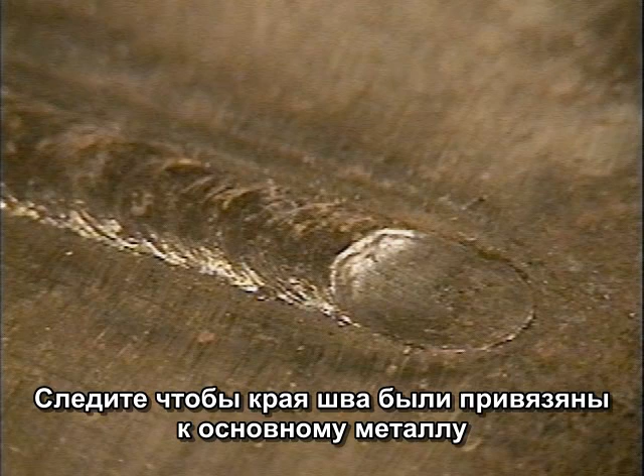When you're done, inspect every weld you make. If what you did worked, do it again. If it didn't work, try something different. A smooth, uniform weld bead will come with practice, but you do want the sides of the weld to be tied in nicely to the base metal.

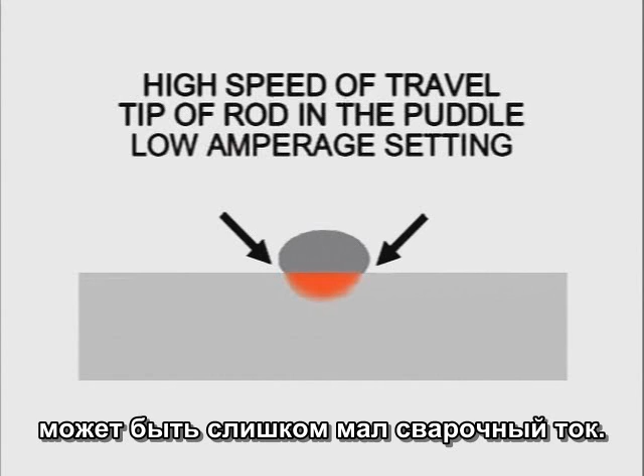If the sides aren't tied in, you may be moving too fast, jamming the rod into the puddle, or running too low of an amperage setting. Moving too slow will overheat the base metal. Long arcing will produce an inconsistent weld bead with excessive spatter.

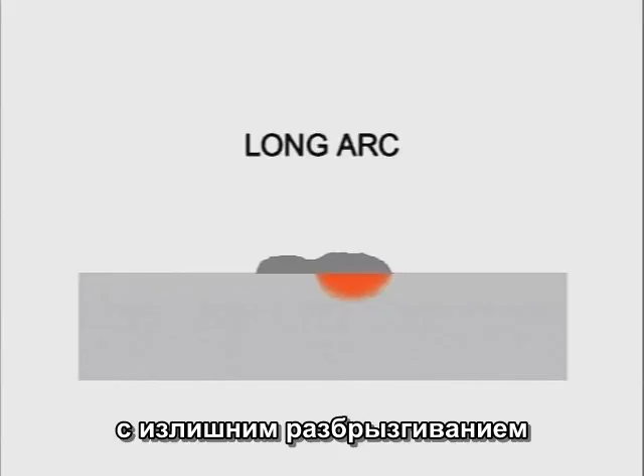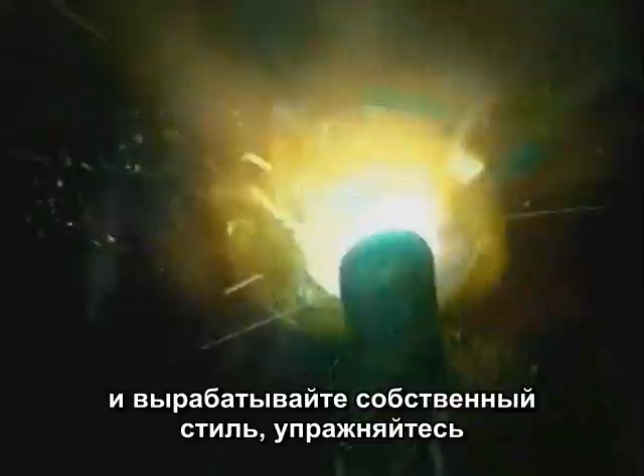Everybody welds a little different, so watch other welders if you get the chance, and develop a style and rhythm of your own. Practice with different types and sizes of rods, and remember, arc welding is about making one good weld bead at a time.